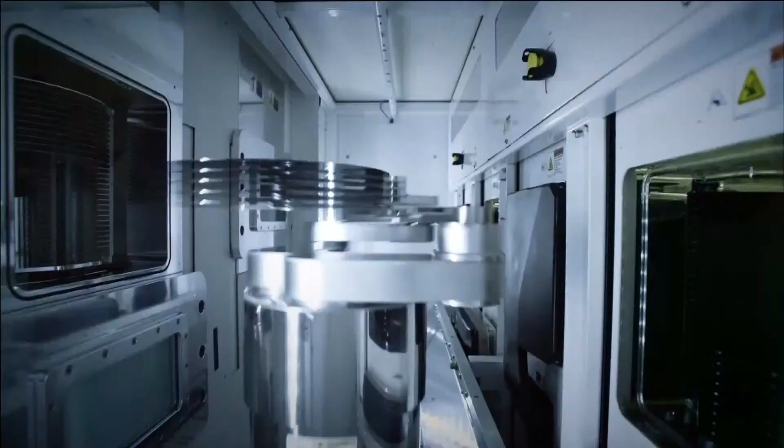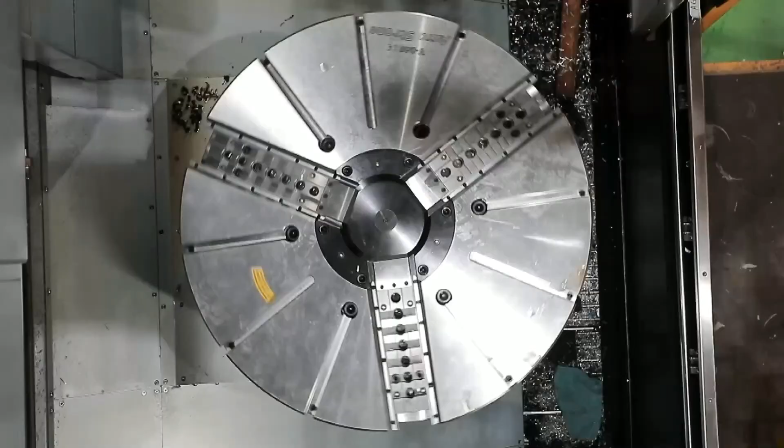Machine tools are the mother of all manufacturing, including the aerospace and high-tech industries, like a giant wheel turning the world. Taiwan's flexible production capability makes us a key partner of the world's industrial powers. We take pride in our sustainable industries.

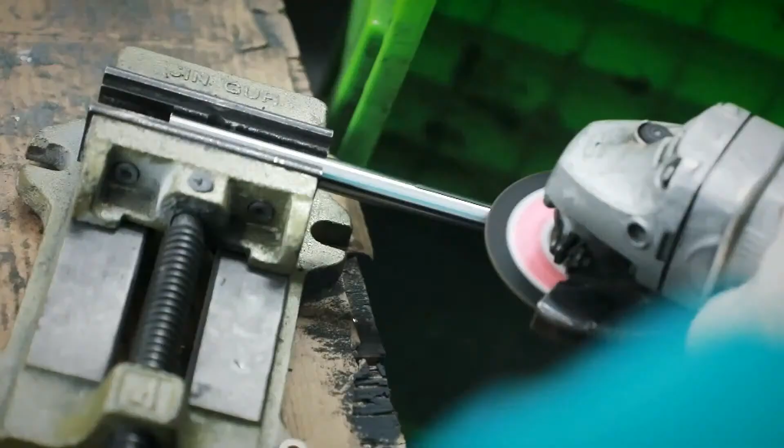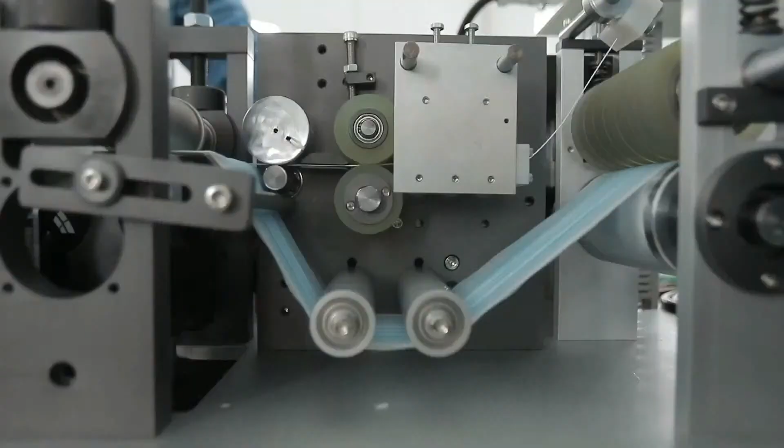The COVID-19 pandemic caused a global shortage of surgical masks. At this critical moment, machine tool manufacturers in Taiwan quickly took responsibility to set up production lines for surgical masks to alleviate the national crisis. Before the pandemic, Taiwan imported 80% of its face masks. Now producing up to 19 million pieces per day, Taiwan is the world's second largest producer of face masks, putting it under the global spotlight.

Over 2,500 people work the production lines. The national team demonstrates the unity, mobility, and efficiency of Taiwan's machine tool industry.

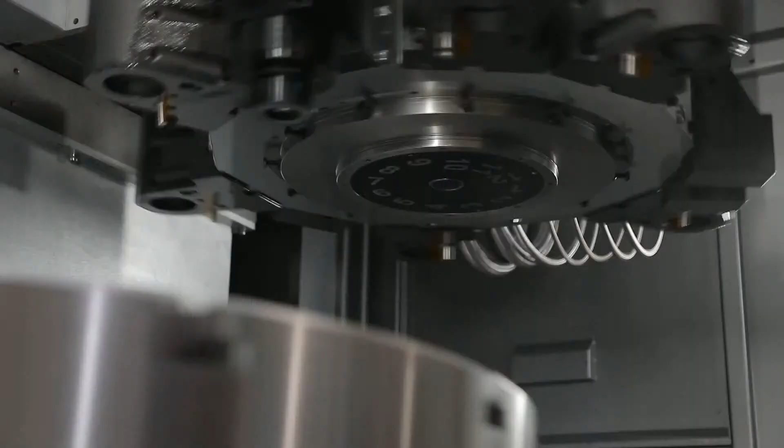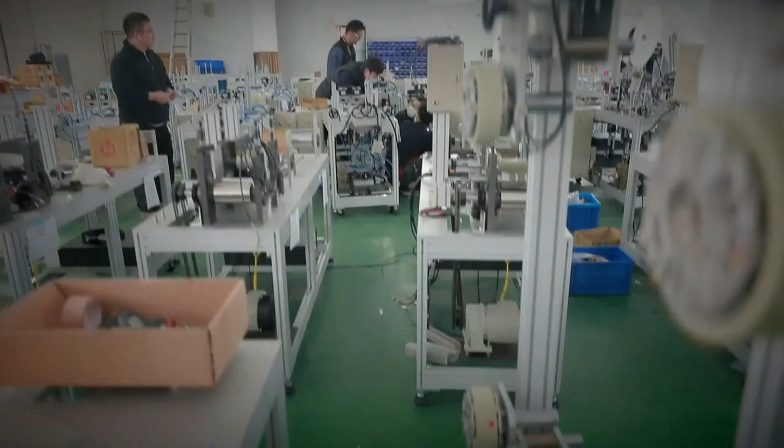A manufacturing hub sits deep in the heart of Taichung. The 60 production lines were quickly set up in 25 days to assist the government. The national team assembles over 30 companies. We support the nation with honor and pride.

We take this opportunity to expand further into the markets of the US, EU, and ASEAN nations, and develop more talents, as well as our capacities in smart manufacturing.

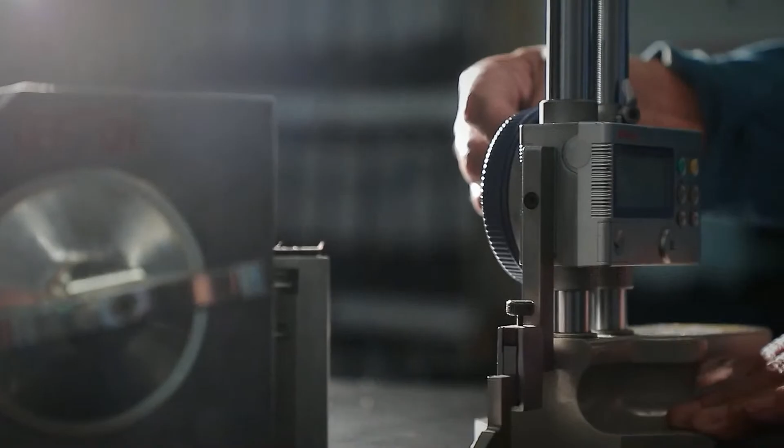Advanced technology with laser-focused dedication for perfection. Machine tools made in Taiwan, featuring Taiwan excellence. Moving towards smart manufacturing.

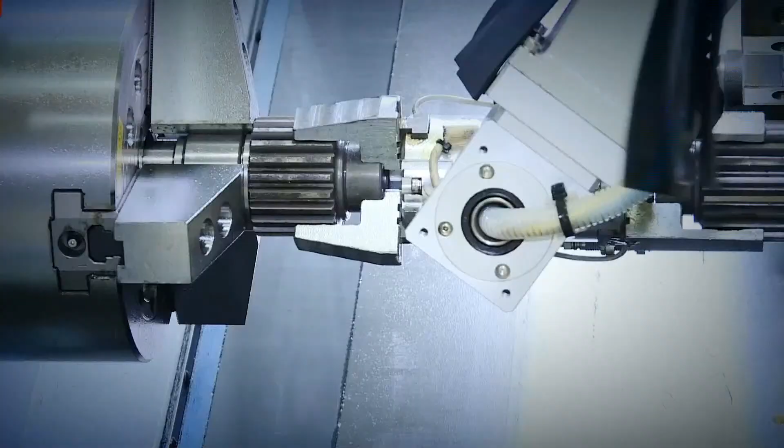As an organizer of Taiwan Excellence, we are proud to promote the machine tool industry and Taiwan face mask team. And we are happy to share this Mission Impossible story with the world.

In normal times, we take care of the industries. When needs arise, the industries combine their forces to support the government. Let me extend my appreciation once again to the machine tool manufacturers for their great support.

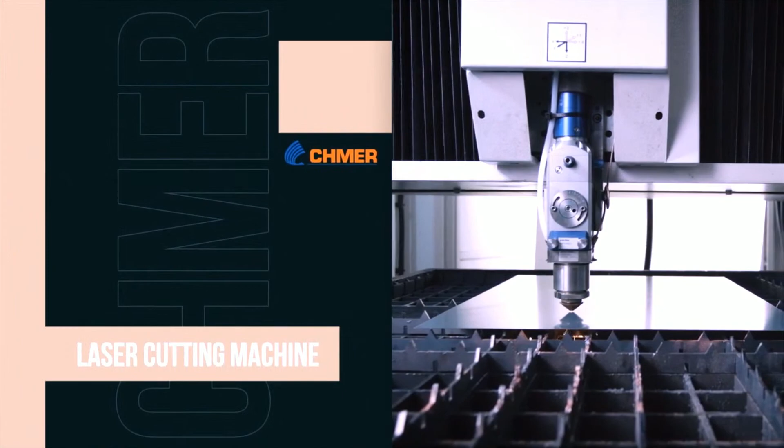We believe that without the hard work and dedication of our employees, there is no way CHMER would be so successful. The original product line consisted of die sinker, wire cut, and drilling EDM. Afterward, the high-speed machine was produced. Since 2018, we've developed a more holistic approach. Our newest products, laser cutting machines and electrochemical machines, will be released over this time. It is a critical part of the process since anything less than 100% quality guarantee will damage our reputation.

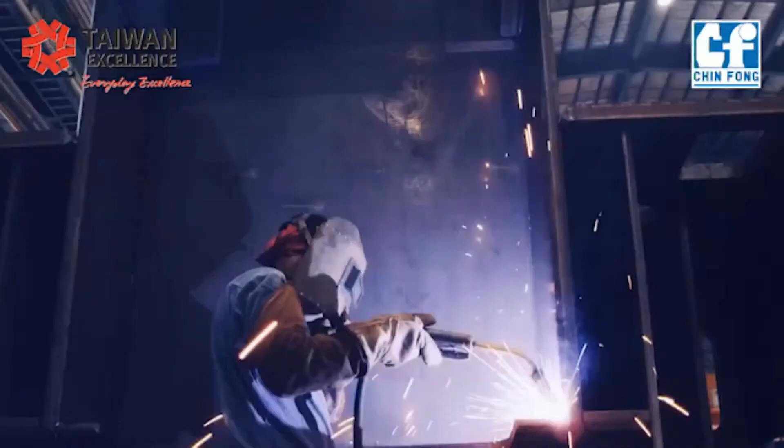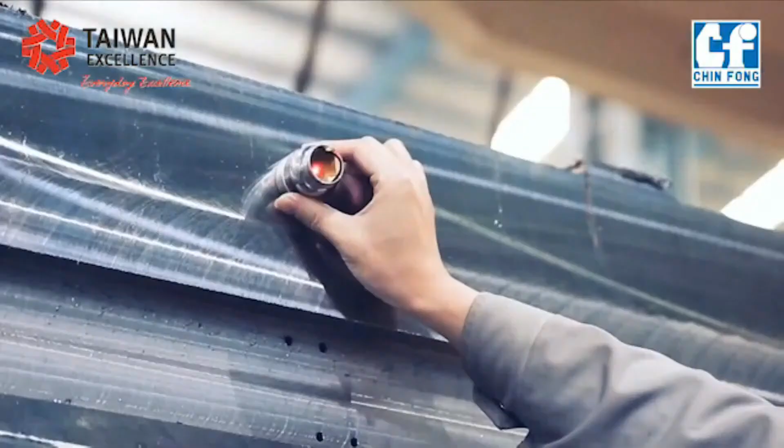Chin Fong Machine was established in 1948. It has grown steadily for more than 70 years. Up to now, we have become one of the 5 press makers in the world and also the largest press maker in Taiwan. We have a strong R&D team, and our service network and products are distributed all over the world.

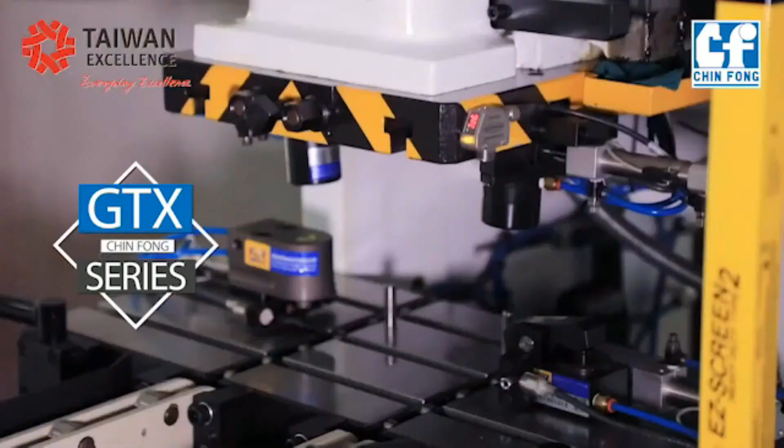GTX series is a straight-side double crank press with a super rigid steel frame that improves stamping precision and prolonged die life. It can be widely used in production processes like drawing, bending, forming, blanking, and trimming.

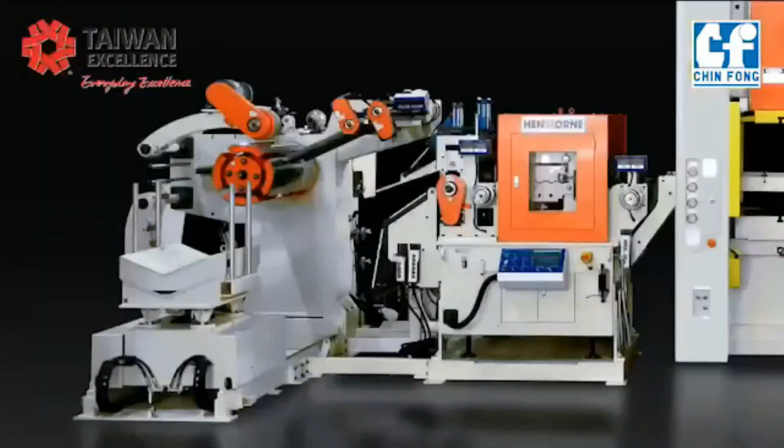When GTX is equipped with Chin Fong's latest iForming intelligent management system, it uses the concept of Industry 4.0 by combining cloud, big data, AI technology, sensor devices, and communication systems. Based on self-monitoring and data receiving function, iForming can provide real-time production information and make our data digitalized and understandable.

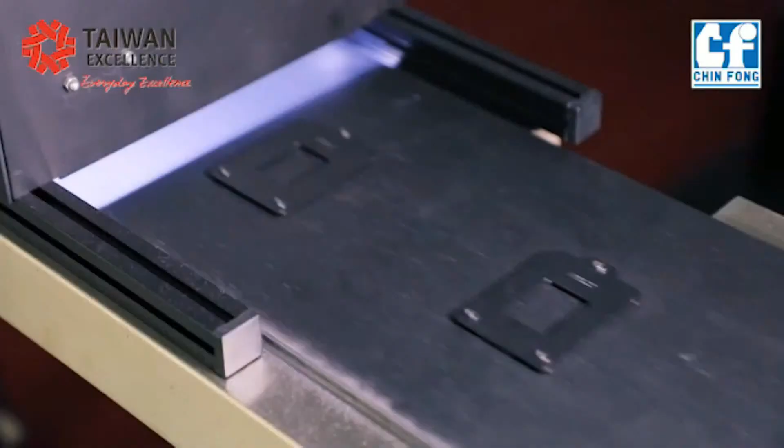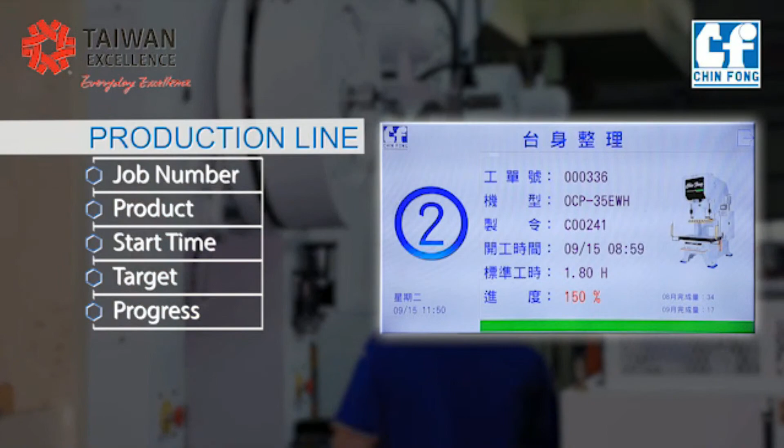When we incorporate the data of produced product into the tracking system, metal stamping industries can use the big data analysis to feed the result back to the operation site. We can continuously improve our standard operation process by optimizing mechanical parameters. This method can not only increase the usability of facility, but also maintain the best condition of the overall factory system. Additionally, we help customers transform from traditional manufacturing into smart manufacturing.

Chin Fong has newly developed a customer support app, which has multi-language support combined with mobile device to meet customer immediate service needs and provide customers with better service. In recent years, we not only strengthened our core products, but also dedicated ourselves to the development of automation and internal systems. Therefore, the product can be produced stably and intelligently and help customers build smart factories.

A client's best partner, EQUIPTOP HITECH Corporation.

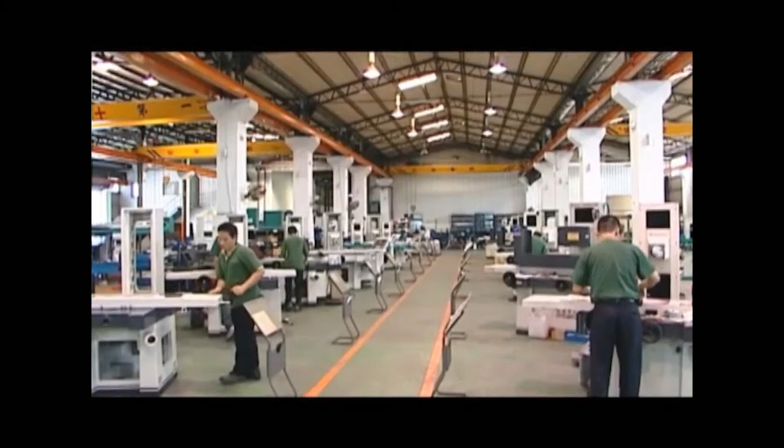EQUIPTOP HITECH Corporation was established in 1988, together with its EQUIPTOP product brand, which is meant to invoke the meaning of top equipment. The company's business philosophy, strategy, and vision are providing vast global customers with the best surface grinders, vertical machining centers, and CNC drilling and tapping machines.

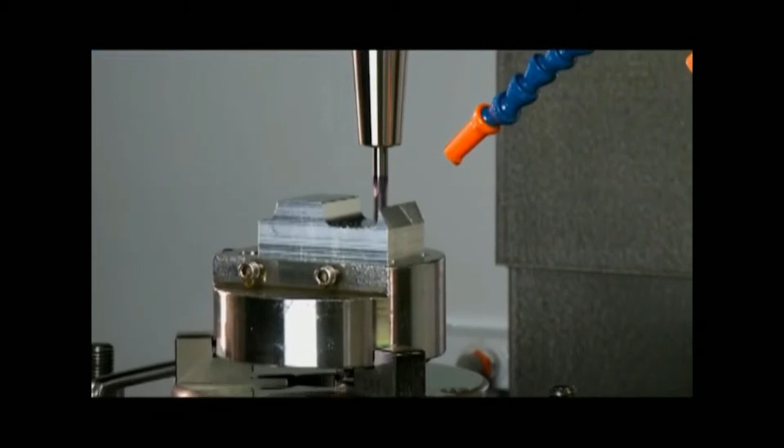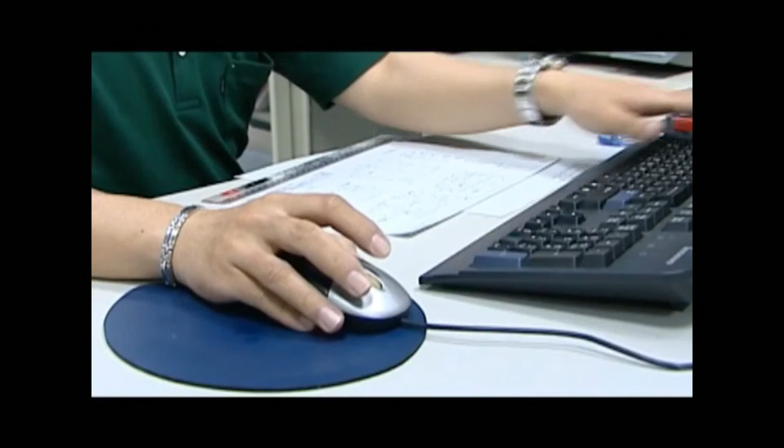Through the spirit of pursuing product excellency, leading technology and perfect service, we provide customers around the world with the best service quality, and become a world-famous, professional, leading manufacturer in the industry.

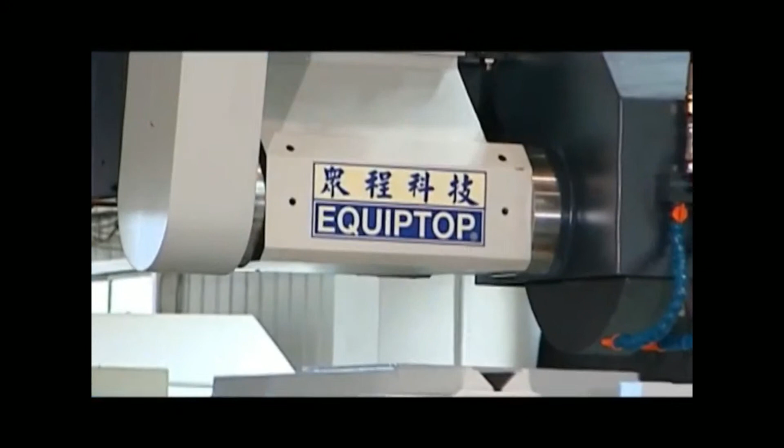Company mission: Customer first and quality assurance is EQUIPTOP's only policy. From incoming material inspection, process quality control, to final and packaging quality inspection, we strictly control every stage, and product quality is continuously enhanced in an effort to achieve customer satisfaction. We promote the global competitiveness of our products and strive towards establishing an original brand from Taiwan.

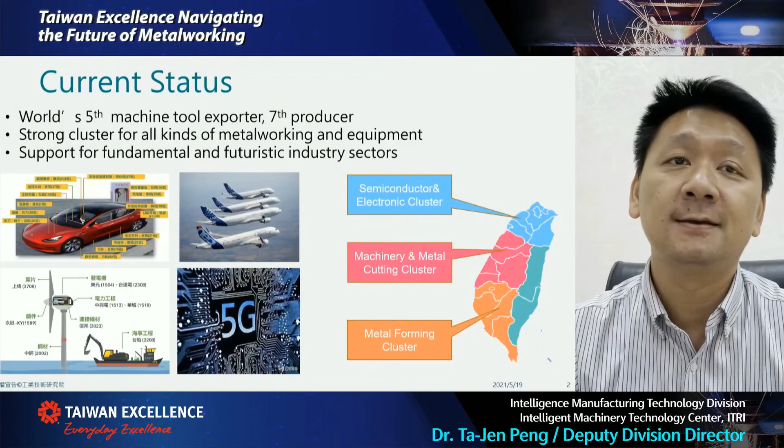For example, recently because of COVID-19, many companies relocated their production lines from China to Vietnam, Indonesia, or back to Taiwan. At the same time, we also incorporate the most advanced high precision and high production technology to upgrade their productivities. So you can see we have equipped this advantage here in Taiwan.

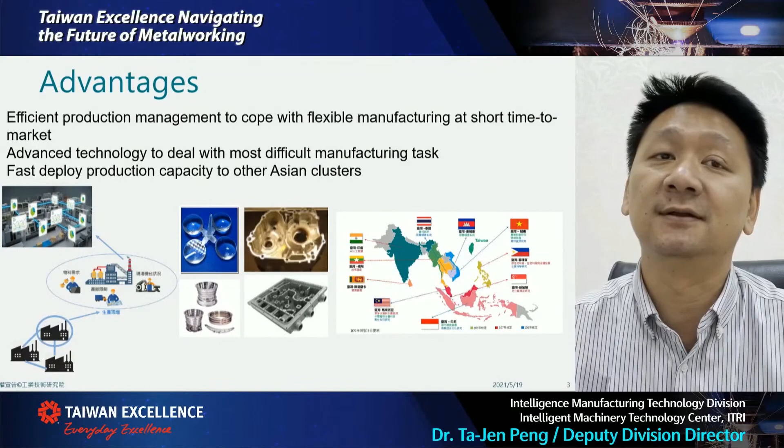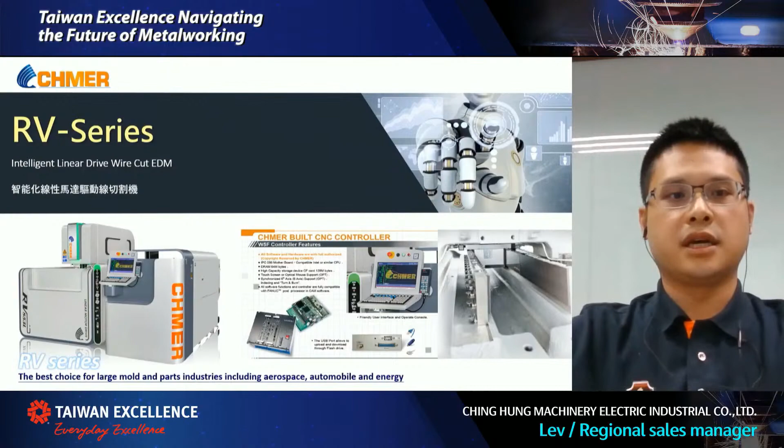Stable processing speed can increase 12% to 50% incremental efficiency. This is a so-called large-scale machine to provide small-scale precision. You can see the R angle and the speed, so it can achieve very convenient and outstanding processes. We have very comprehensive sales and service, including in the Greater Russia area. We have a station to provide sales, education, and training. So we welcome you to visit us.

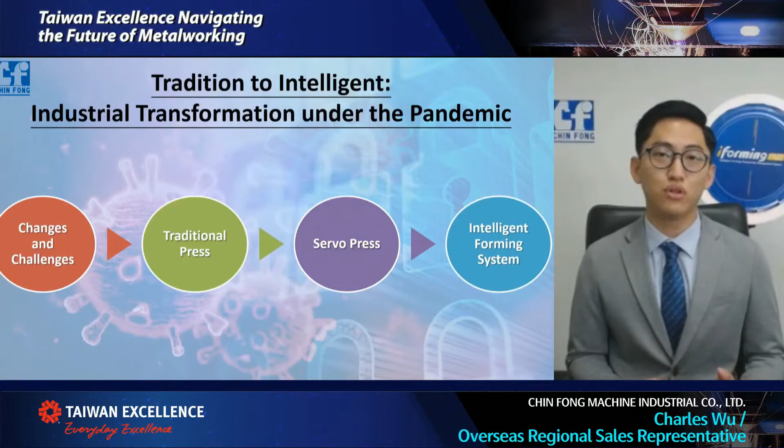Next, regarding under the COVID pandemic, we have comprehensive intelligent upgrades to meet delivery and reach revenue and profit, along with the delay of ocean freight and raw material deficiency.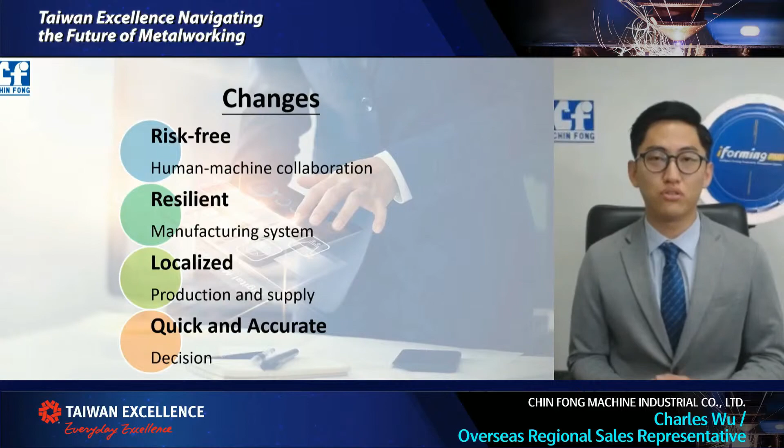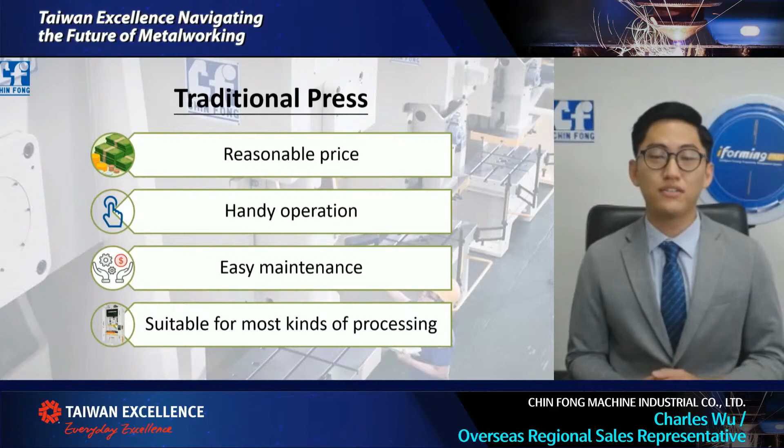So in the future, we need to move toward risk-free human-machine collaboration, resilience, manufacturing systems, and also localized production and supply, as well as quick and accurate decision-making. With regard to the trend, for this machinery industry, we need to meet a reasonable price, handy operation, easy maintenance, and suitability for most kinds of processing.

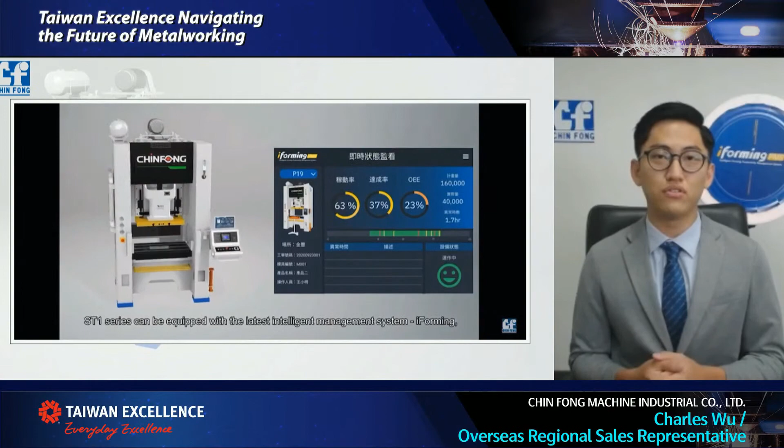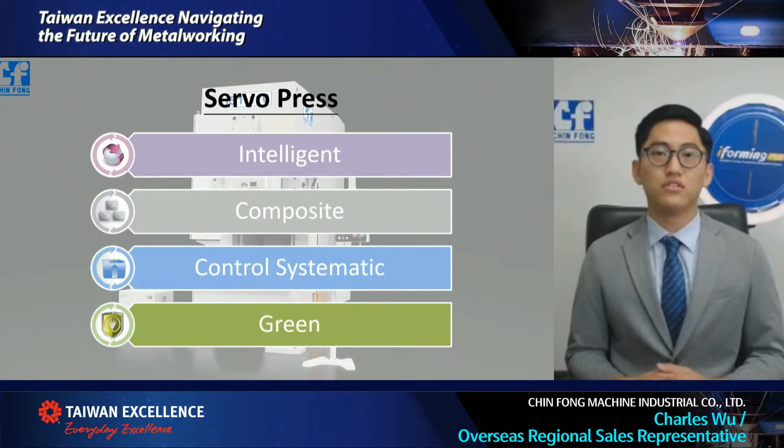Recently, you can see this servo press can meet the intelligent composite control system and the green trend. Compared to traditional machines, we normally have one unit, but now you can link everyone together on the internet. From traditional to smart, we combine various features. On top of the basic mode, we also have pulse and pendulum mode to meet different demands and save energy.

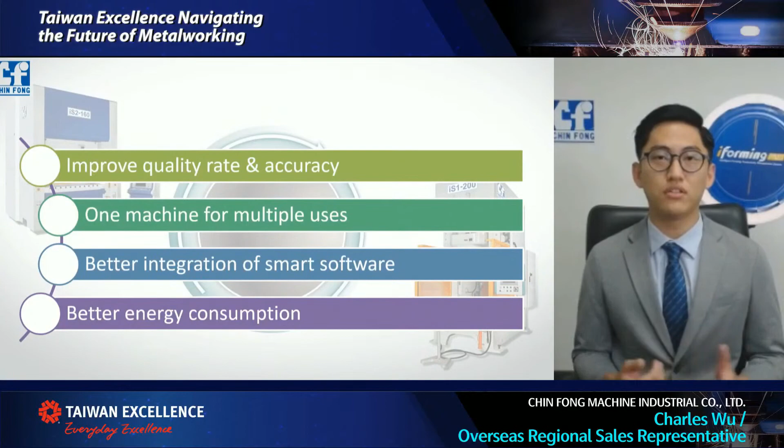When we talk about the intelligent forming system, we can have better efficiency combining the composite and better integration of smart software. Compared with traditional machines, which are straight side, single or double crank direct drive servo presses, we have equipment intelligence, factory intelligence to save energy, and service intelligence.

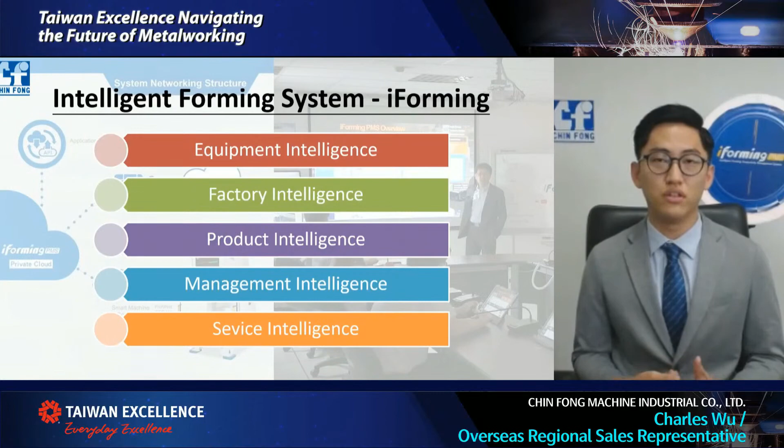We believe in the future this will be iForming, the best direction for industrial transformation. This iForming is a smart management system integrating the most cutting-edge AI, IoT, and analysis. So you can have equipment intelligence, factory intelligence, product intelligence, helping customers move toward smart intelligence and manufacturing. This envisions a much smarter style of manufacturing.

You can see this intelligent plan, intelligent equipment, intelligent service. Through this installation, we can collect information and have live surveillance, so this service is very, very important. With traditional automation, data collection and software linkage can help the customer build a smart factory goal.

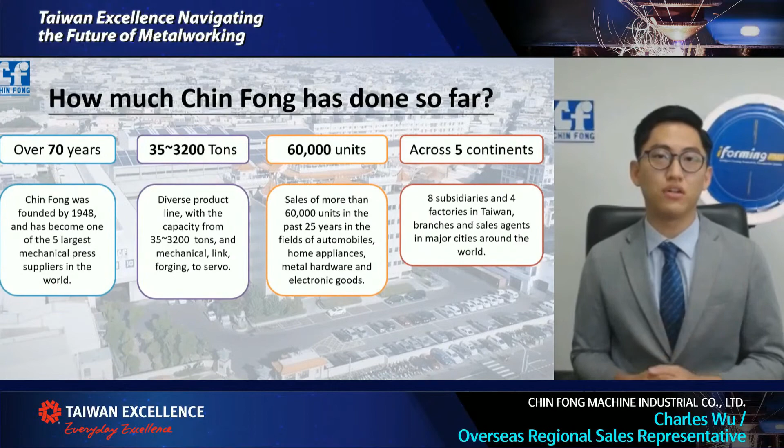In the past, Chin Fong experience has developed into stable, good quality, reliable equipment. For the past 25 years, we have sold more than 60,000 units across the world. We have distributors around the world to provide comprehensive service. Last but not least, I wish you can browse Chin Fong and collect more detailed information. Thank you very much.

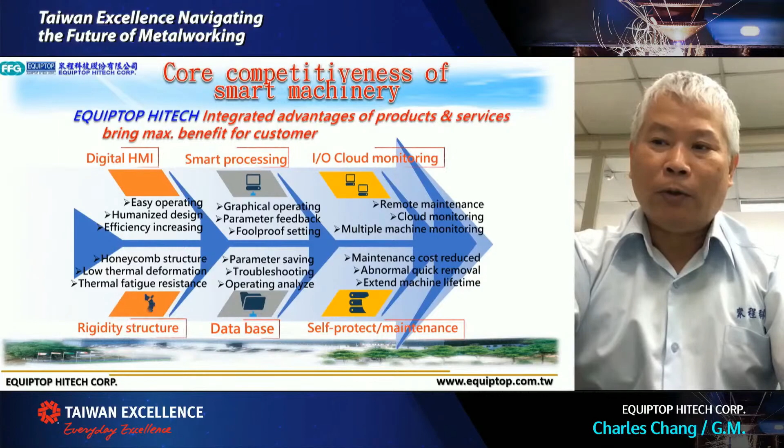We start from digital, especially the I/O and big data application, as well as technology advancement. Our panel here is digitized; this is a touch panel, and we support about 50 languages.

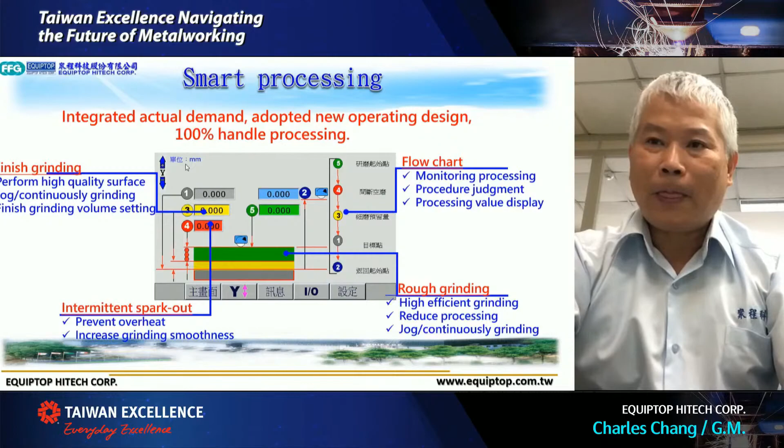For smart processing, we have finish grinding, intermittent spark out, rough grinding, and a flowchart adopting a new operation design to meet 100% handle processing. Our system and I/O monitoring integrates multi-function signals to achieve monitoring of the whole machine's working condition, so one window can handle everything.

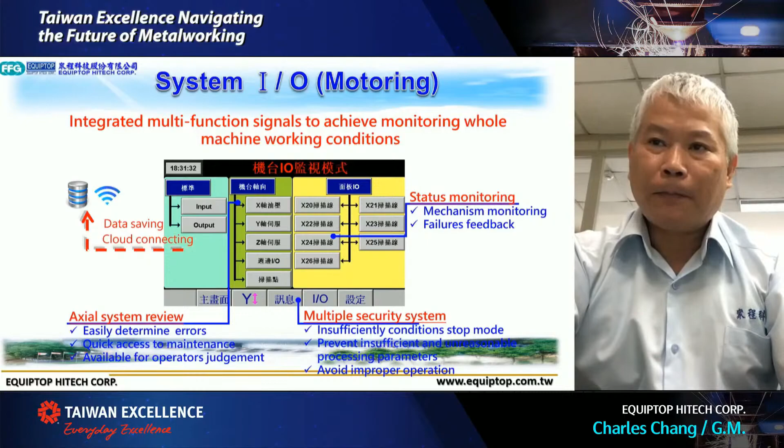For big data information database, we have unique integrated technology. We can accumulate 90% of general operation data, so the user can effectively be aware, alert, collect all necessary data, and conduct a dialogue with the machine.

This is multi-unit monitoring; we have remote control of machine working status through network connection. This is the wheel selecting support, providing expert wheel material recommendation to achieve the best grinding quality.

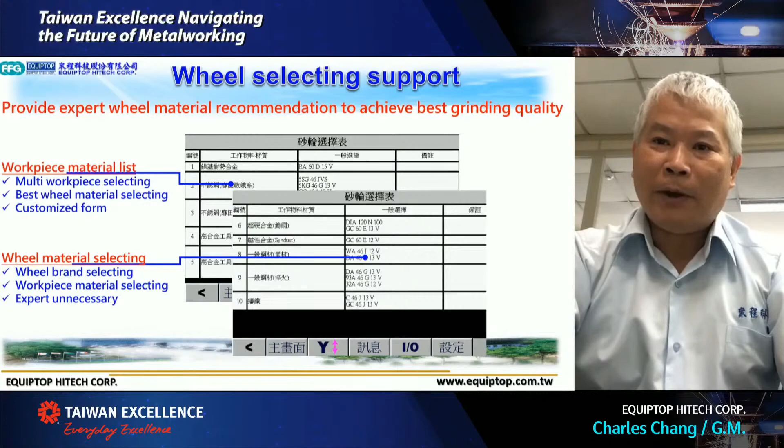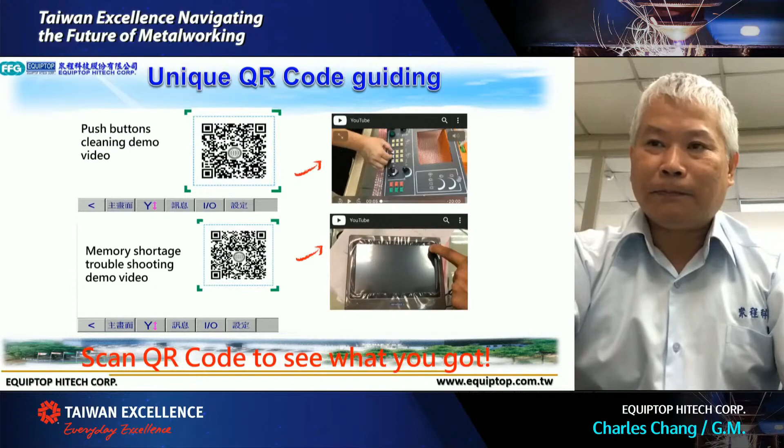We utilize a unique QR code guiding push buttons, cleaning demo video, and memory shortage troubleshooting demo video on YouTube to monitor maintenance status. We also have innovative equal feeding speed control with SP level class linear guide way, and a Z-axis equipped with a reliable direct drive transmission mechanism.

In terms of international competitiveness, EQUIPTOP occupies a very high export portion. We have high quality post-market service, and to optimize customer efficiency, we also have a pre-warning system and troubleshooting service. This is the substantive benefit.

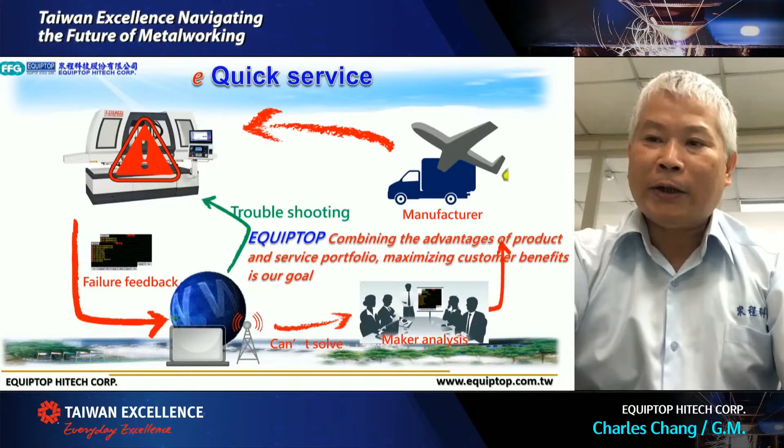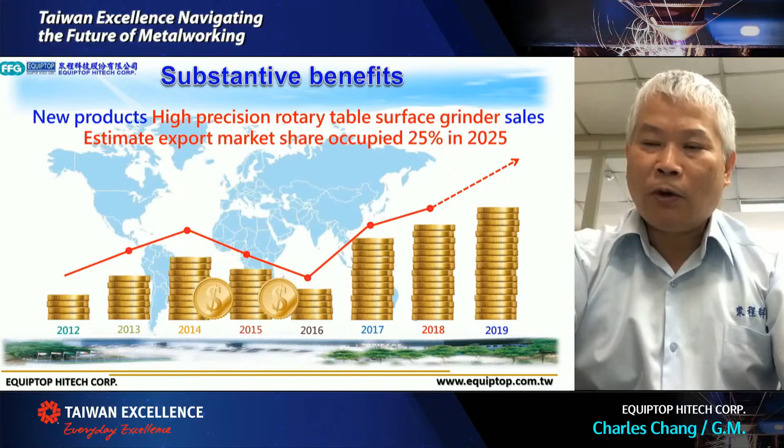EQUIPTOP's investment in new products aims for high precision rotary table surface grinder sales, with an estimated export market share goal of 25% in 2025. Future outlook: we would like to integrate changes in IoT, Internet, and AI to catch market trends, development, and create value for our customers. We are moving toward customized production, e-job, and data analysis and upgrade.

So this is my presentation. I wish we can provide the most comprehensive machine to our customers. Thank you very much.

Now I'm going to enter the subject: the development and trend of drills. We use various drill cutting tools to drill holes on various machines.

In the past, we used the same products. Now there are very few drills designed by material. As technology advances, current CNC machinery uses high rigidity structural design, high-speed cutting, high-precision machining, and the development of green manufacturing.

Most processed products use composite materials, with product design complexity increasing and difficulty of processing increasing, enhancing the challenge. Based on the demand for high value-added products, the requirements for cutting tools are getting more tricky.

We have all kinds of drills for all kinds of alloy materials. With regard to high efficiency drilling in various types of manufacturing, including internal water injection, we have 2 to 5 extended lengths for drilling tools.

We have 3 elements that affect tool cutting performance: material, geometry, and coating. Speed Tiger's cutting tools are very reliable and high efficiency, and Speed Tiger is the first company to integrate product tools, so we can design dedicated tooling for the customer's cutting and performance demands.

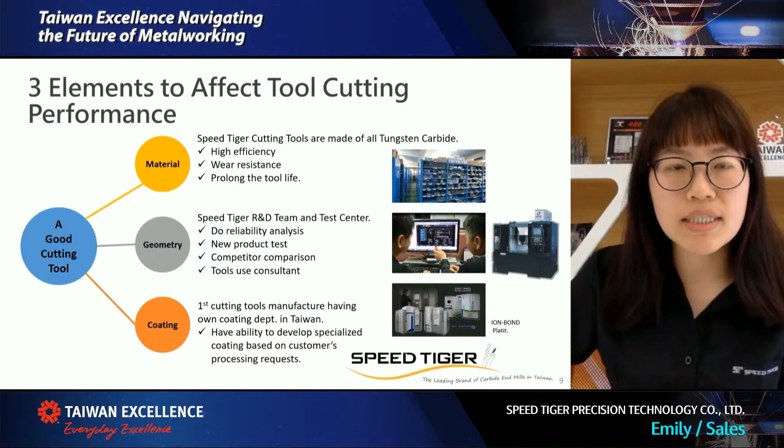Next, we'd like to talk about the features of SN/SNC drill bits, special drills for stainless steel applications. There are problems when processing stainless steel: it is difficult to dissipate heat during cutting, work hardening occurs, and chips stick, especially in electronic products or healthcare applications.

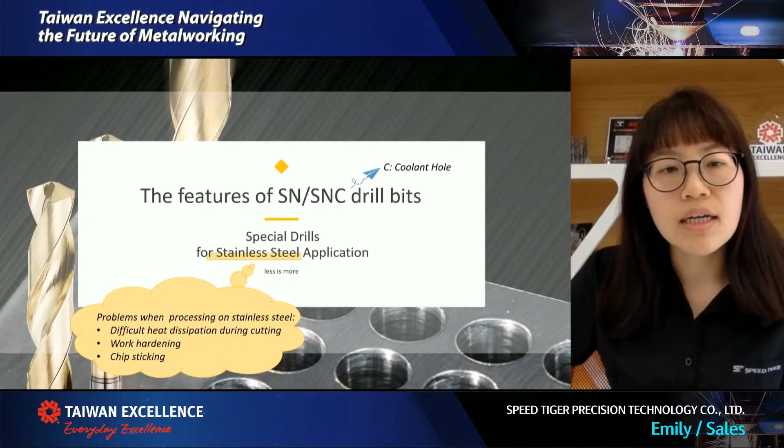Based on the above, our R&D team designed anti-vibration features to improve hole accuracy. You can see equal flute spacing and symmetrical margins that effectively improve the margin top position to advance drill precision.

We have significantly reduced vibration during processing to allow high precision straight cutting and achieve a smooth drilling surface. This is very important because it causes the SNC tool life to be longer, with a beautiful surface finish.

We have improved chip removal a lot through helix angle and flute design, a perfect point angle and relief angle, a polished passivation treatment, and a coolant hole including a water injection system to effectively achieve high reliability and high precision.

With the ZrN coating, compared to SUS316, we have better wear resistance suitable for high-speed machining with both dry and wet cutting. Across various stainless steels and alloys, we also optimize hardness, coefficient of friction, and oxidation temperature with high-performance coating, making it very reliable for titanium alloys to reduce hardness issues.

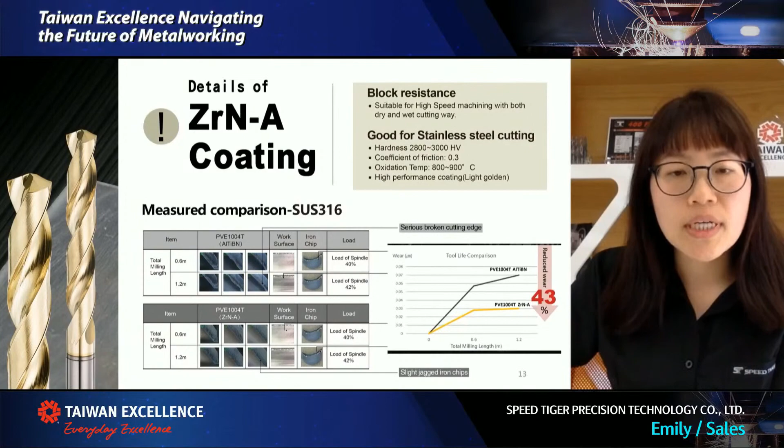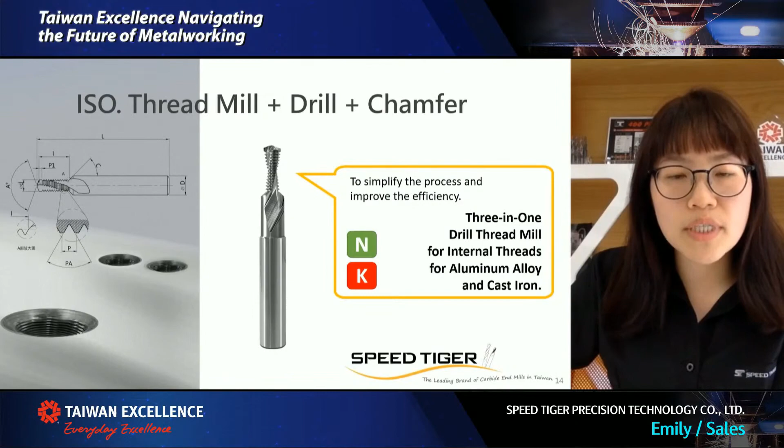Lastly, I'd like to add one more new product: ISO thread mill and drill plus chamfer. This is a new product we launched this year, a 3-in-1 drill thread mill for internal threads for aluminum alloy and cast iron. You can review our website for our latest information.

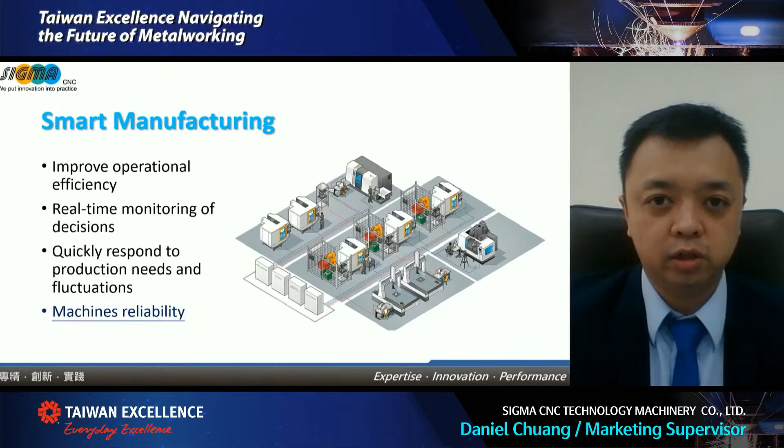So how do we step by step construct our smart manufacturing? From the machine part, we can use single unit intelligence. We use IoT sensors, including automation facilities. For example, this is a robotic arm or automation monitor system.

So through this regional internet, we can collect the machines' data as well as production process data. Through cloud computing, we can convert this to prediction, projection and analysis to feed back to intelligent scheduling. Through the internet, we can also let the operator monitor the production online and conduct immediate decisions.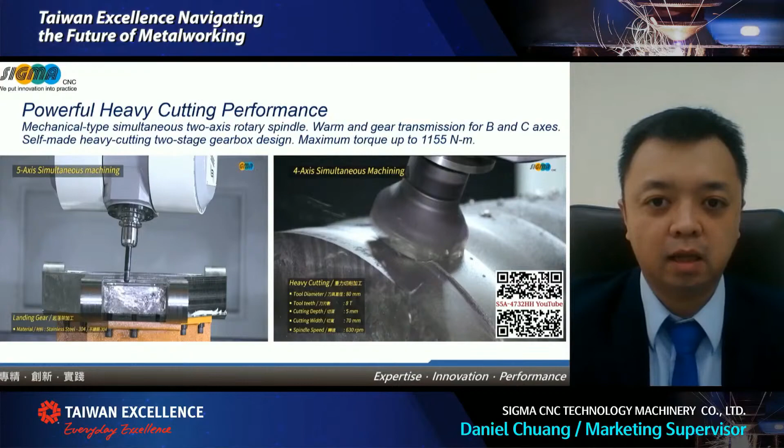Last but not least, with regard to the application of the products, we have very diversified CNC products. We also have CNC customized grinding machines for linear track applications. Our customers are HIWIN, THK, as well as other international global companies.